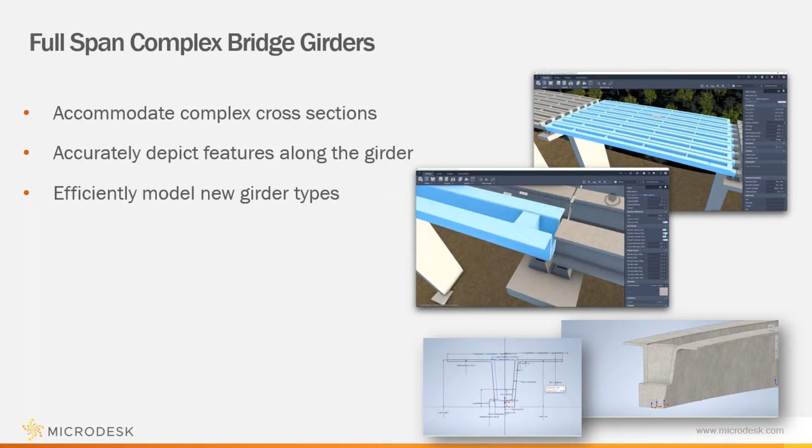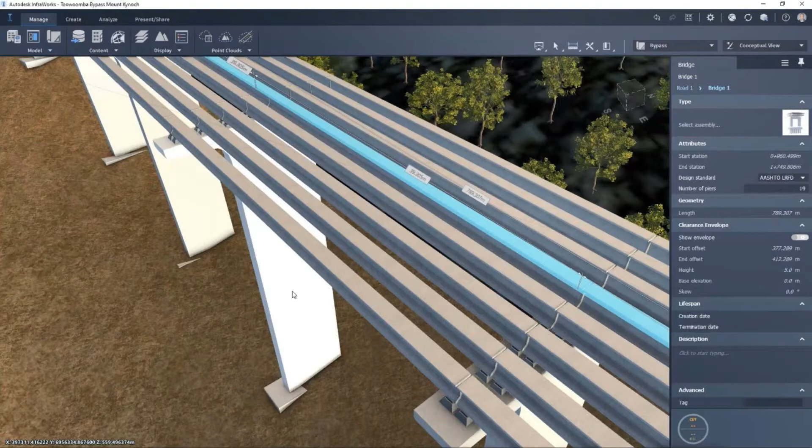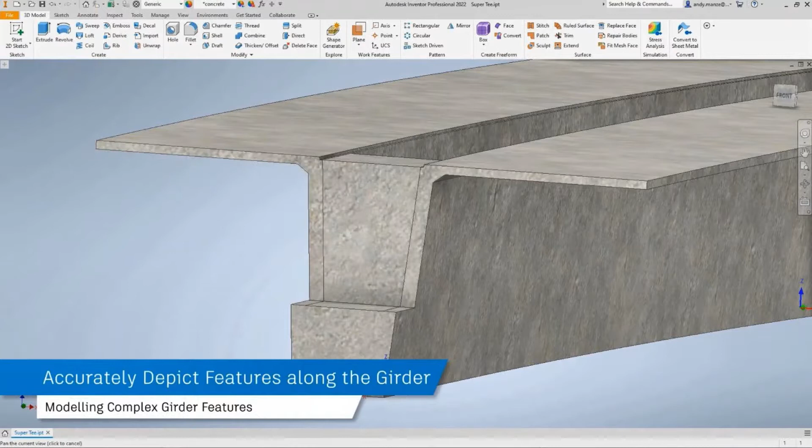It's then possible to start to model additional features along the length of the girder, as in this case where a number of individually defined cutbacks and diaphragms are placed along the length of the girder. Whenever needed, iLogic can be used to define conditional modeling if required. The newly defined complex girder can be added to the InfraWorks bridge component library and configured as needed.

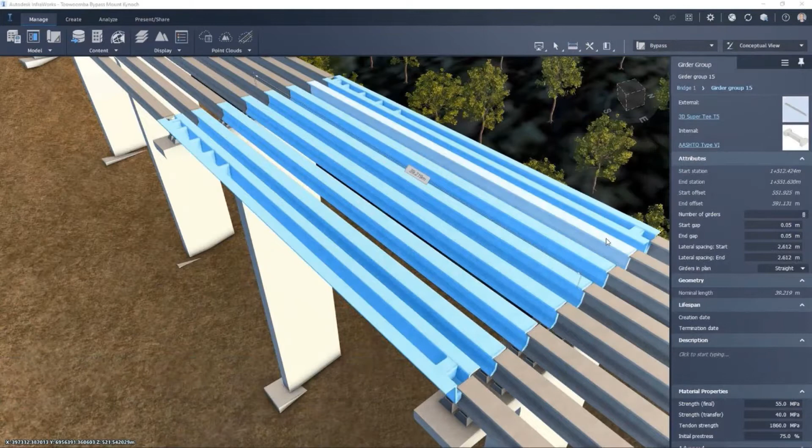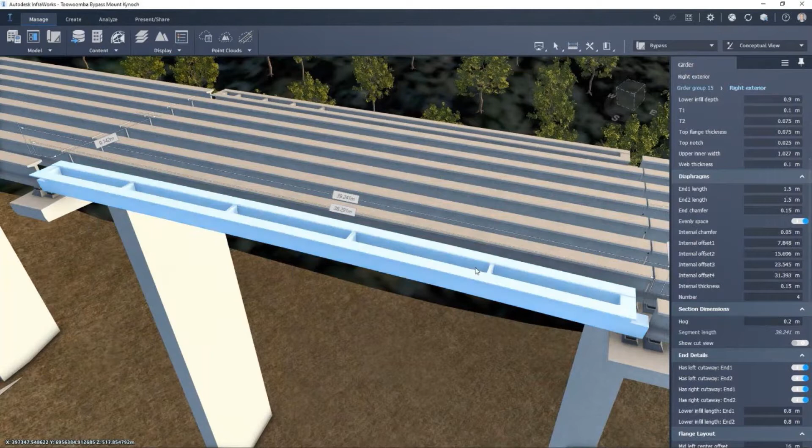The process of replacing the existing girder arrangement can proceed by selecting the new complex girder from the library. The new modeling options provided in the Inventor modeling phase are then exposed within InfraWorks and can then be used as seen here by adding girder end cutbacks evenly spaced and along the diaphragm and adding a precamber. The changes can then be made and then copied to all the additional girders throughout the model.

Active road decorations have been added to the software, and if you haven't explored these, they are a great little tool that can really streamline a lot of the mundane tasks of adding content to your models. Today we'll be focusing on adding them to roads, or component roads in this scenario.

But what is really nice is they've also added it for general layout and design. So you not only can add active decorations to your roads, you can actually add active decorations anywhere you'd like within your model. So why don't we take a moment and explore these new features.

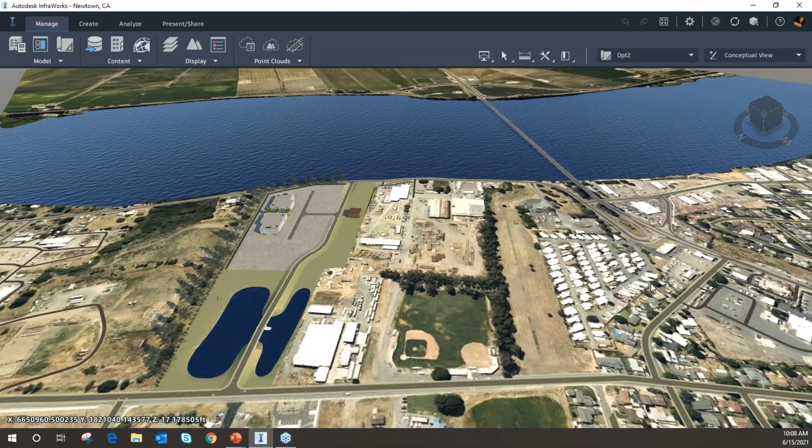In this InfraWorks model that you're seeing, I've laid out a quick little model site utilizing Model Builder and started sketching in a little bit of content for us. I've identified an area where potentially a new project site will be located. And in here, I have a couple component roads, and we'll use those for demonstration.

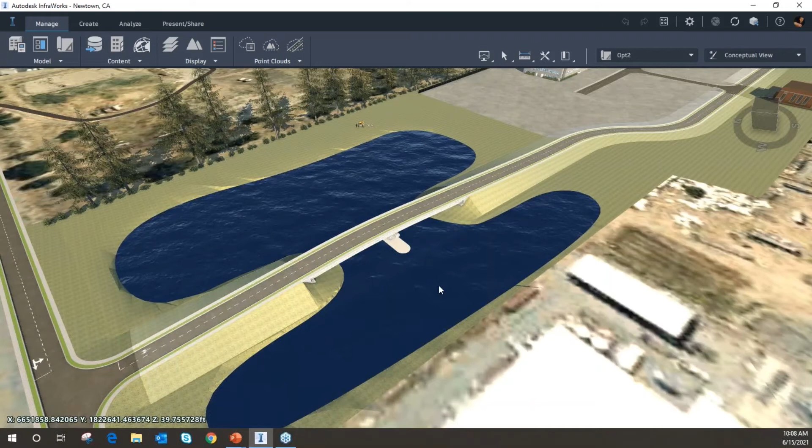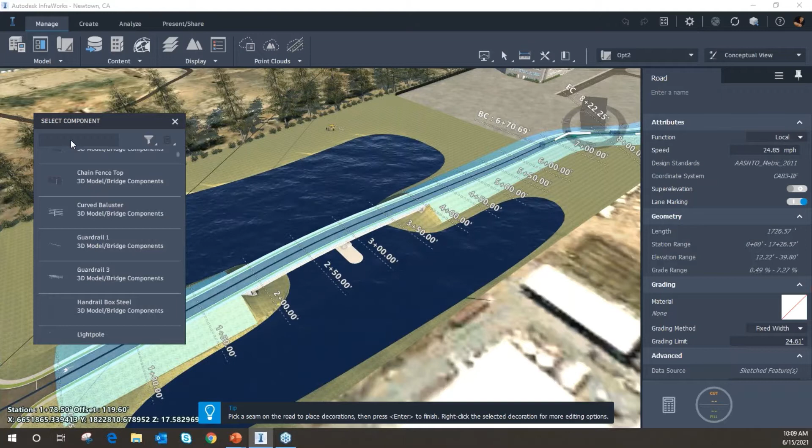So when you select a component road, it'll activate and show you the tooltips for a component road. You can then right-click, and you'll see the option for placing decorations. Once you choose that option, your style library will appear and allow you to search for any type of feature you'd like to add.

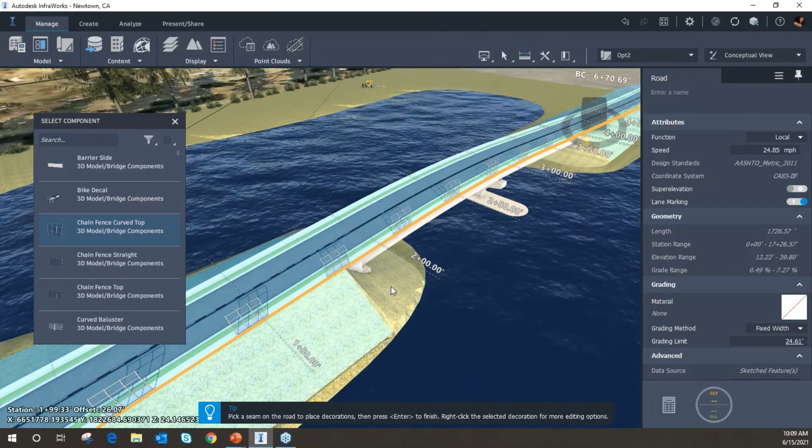So for example, if I wanted to use a curved top fence for this bridge portion, I can do that, and then I can choose which feature along the road I'd like to attach it to. So I'll click and place that, and you'll see how they instantly get added. What's really nice is we don't have to wait for the model or the road to regenerate. And they get added to the entire length of the model.

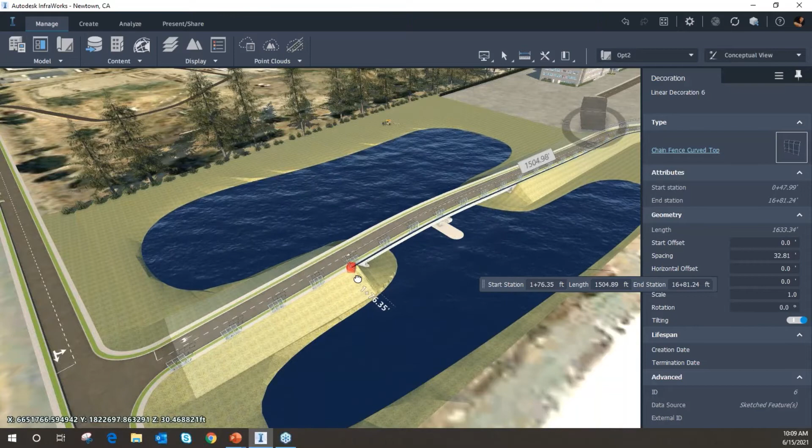And then once those are placed, you'll be able to go in and adjust the properties of them. So we can adjust these start and end points. Do that over the top as well. And you see how they trace the road geometry, regardless where you're at or what you're doing.

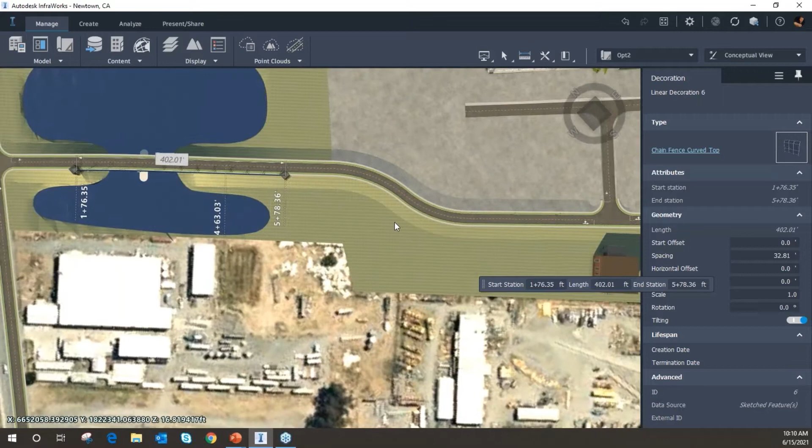And if you haven't noticed already, on the right-hand side of the screen, there's a properties panel for how these are being laid out. You can go in and start adjusting the start and end points if you want, or you can graphically digitize them as I've done. You can adjust the spacing. If I'm correct, I believe these are 10-foot fence spans. We can set up those. You can adjust rotations, offsets, anything else you'd like regarding that fence.

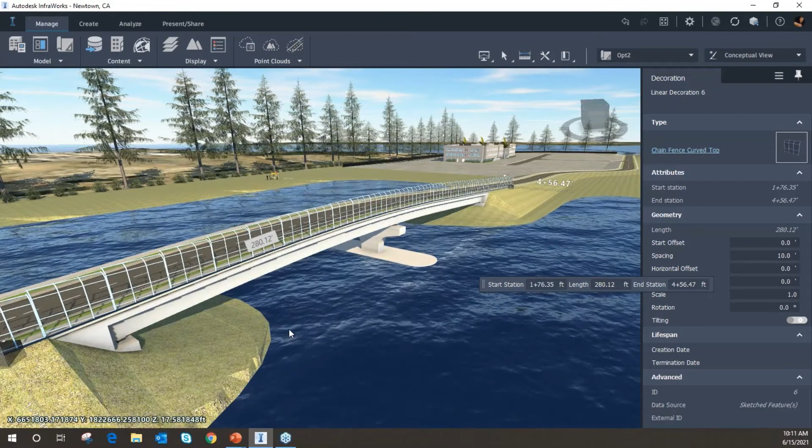And what's also really nice is we have this tilting option, and I have it on by default, but when you don't have that on, you'll probably experience what you may have been experiencing in the past with these types of objects, where they start getting very fragmented. So if you've ever tried to put in a guardrail, a jersey barrier, anything, and everything starts looking a little fragmented and goofy, that's what's great about this little tilt option.

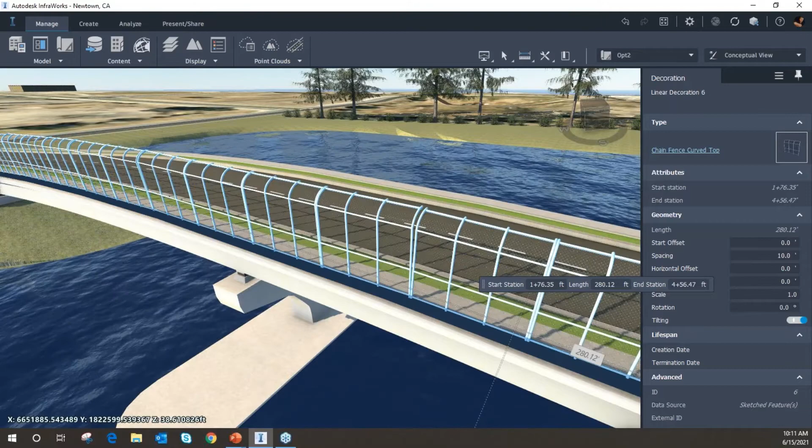We can turn that on, and it will then follow the geometry of the road. So we get a much cleaner section and detail. We can do that again for the other side. Place decorations. I'll use the same component. I'll add it there.

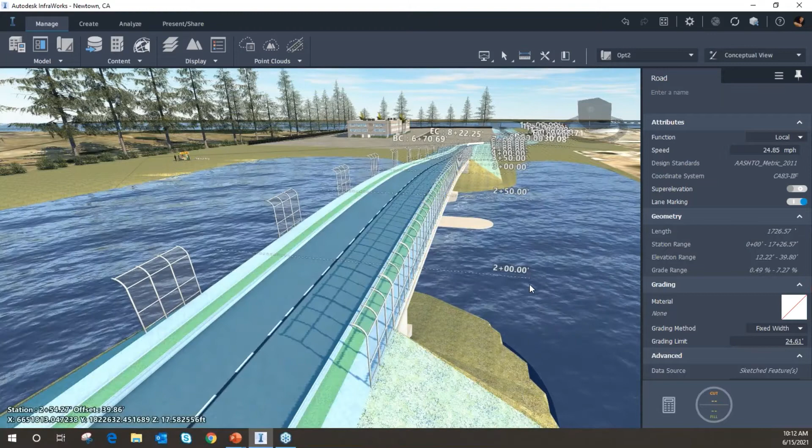And this time, in this scenario, I'm going to need to rotate those 180 degrees so that they face the other way. Once again, we'll do 10-foot sections. And then, as you would imagine, I would go through and redo the start and end points.

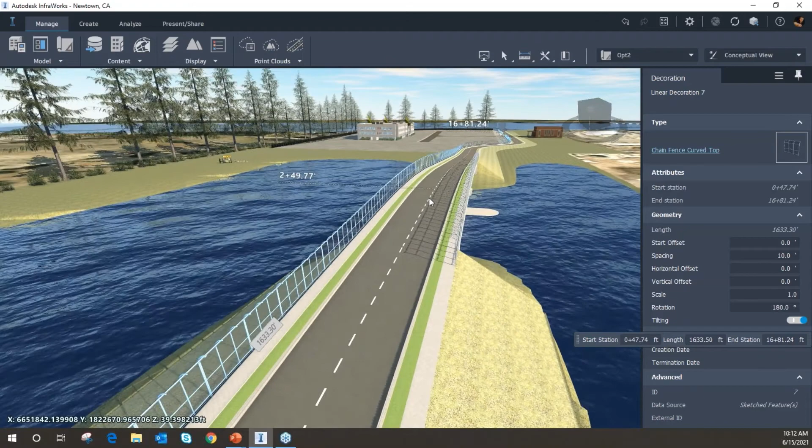So again, you can add all the different content you want to your road without having to go and rebuild a new assembly. So if you wanted to add street lights or trees, things like that, really useful. Another really nice feature that I found it very useful for is adding traffic.

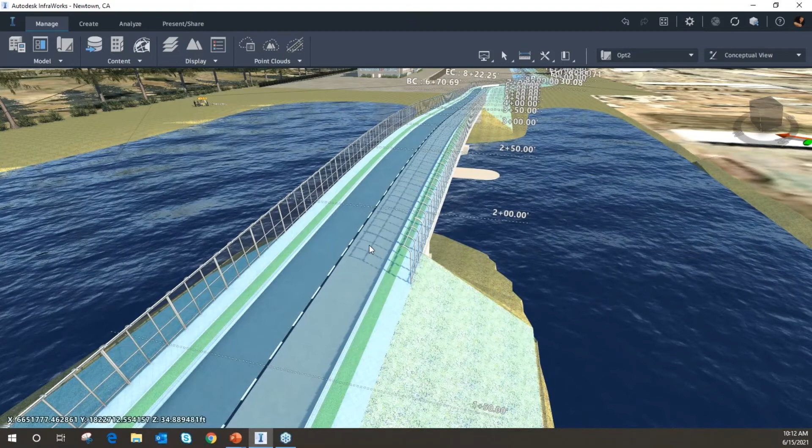Of course we do have the traffic analysis tool, but if you ever just want to populate your roads for a more realistic model, and if you've ever done that before, you know it's very detailed. It takes a lot of time because you have to add a car at a time, and then you've got to rotate them so that they follow the directions of the road and things like that.

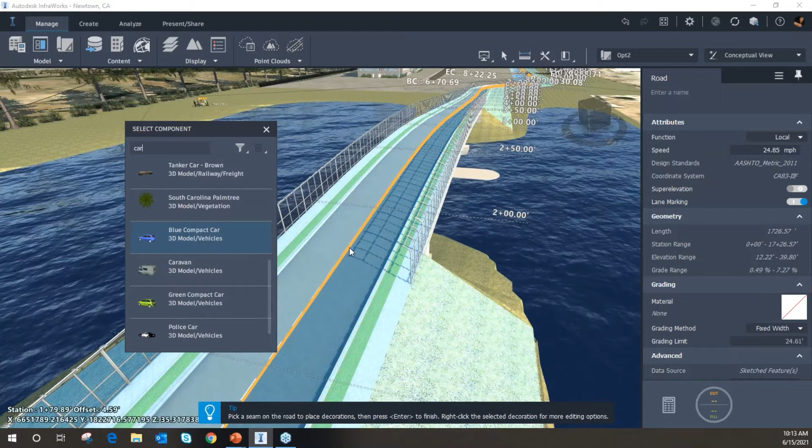But if you just come in and look for any kind of a car, grab one of these, and put it on the center line of the road here. Then once those are placed, again, we get the properties. We'll adjust the spacing to something much larger, maybe 150 feet, and then a horizontal offset like that.

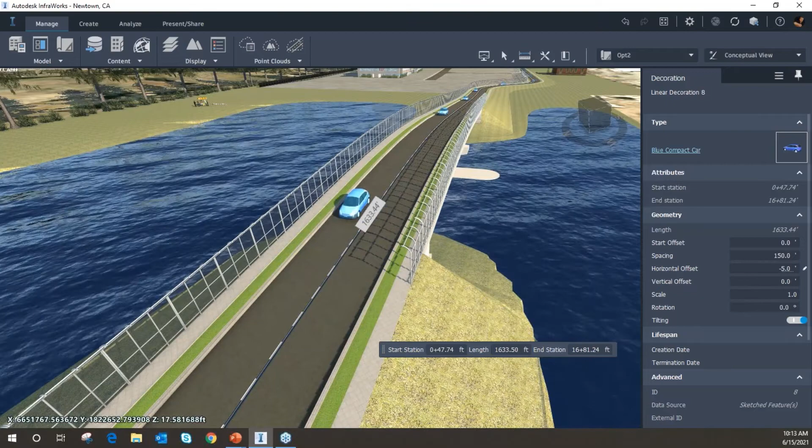And then you can use your style palette to kind of drag and drop different car styles so you get a variety of cars. And then obviously I could do the same thing again on the other side of the road, going the other direction with 180 rotation.

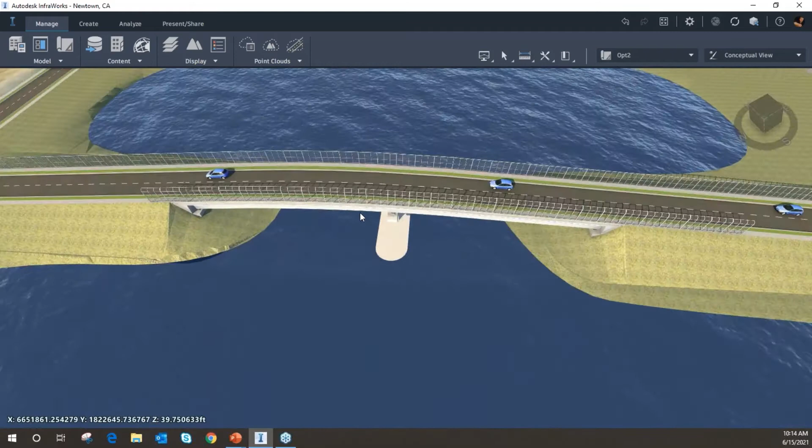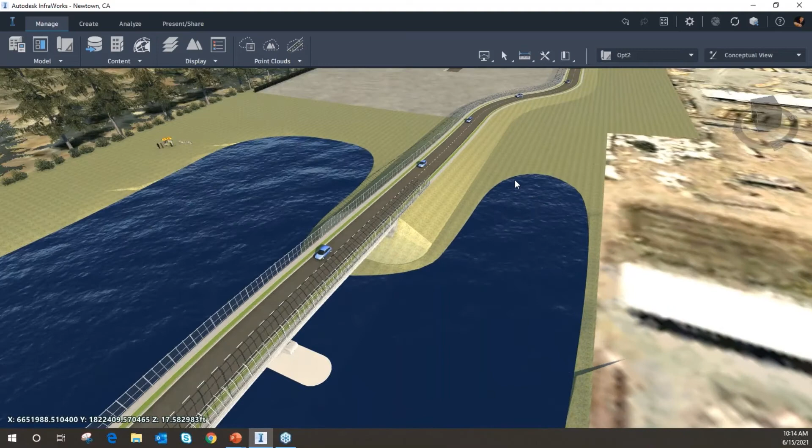But again, if you've ever had to go through and add those types of things to your models, you know it can be very tedious to get them to line up just to the middle of the road and get them to curve and follow along each of the geometries and such. So you'll find that these placing decorations are really useful and really handy. They can save you quite a bit of time.

And then, as mentioned, if you go to the Create panel, you'll notice that we actually have a Place Linear Decorations tool where you can actually just place linear decorations anywhere within your model just by clicking and identifying where you want it to go. So that could be vegetation or bollards, or just about anything that you can think of that would be really handy to see. So I think that's a really nice enhancement and can definitely streamline a lot of your workflows.

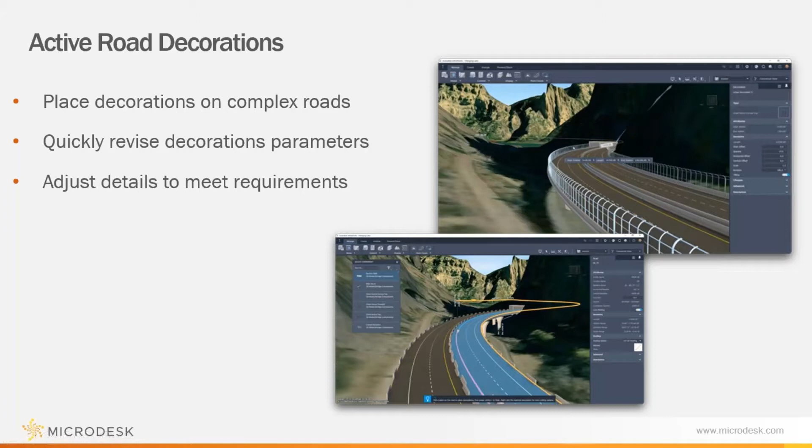Another nice enhancement they've done to the software is they've expanded the vegetation library. And they've done a really good job on this because it allows you to have much more content to choose from, and it's much more realistic. So rather than just applying a grass material to your terrain, for example, you now actually have grass and flowers and bushes, shrubs and meadows, things like that. So it's definitely a nice little enhancement. So let's take a look at some of that as well.

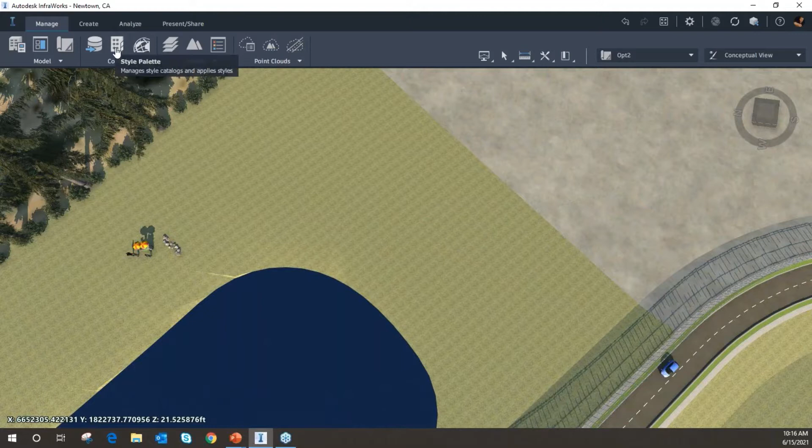So if we identify an area, let's go and find some open space, maybe right over here. We can come through, and on the Create panel, we can choose to create whatever we'd like. And in this case, we can use stands, rows, whatever we choose from. But before we do that, let's take a look at what they've added. So I'm going to go back to my Manage panel and open up my Style palette. Inside here, we can toggle through the various groups. And in this case, we'll be looking at 3D models, and we'll go over to vegetation.

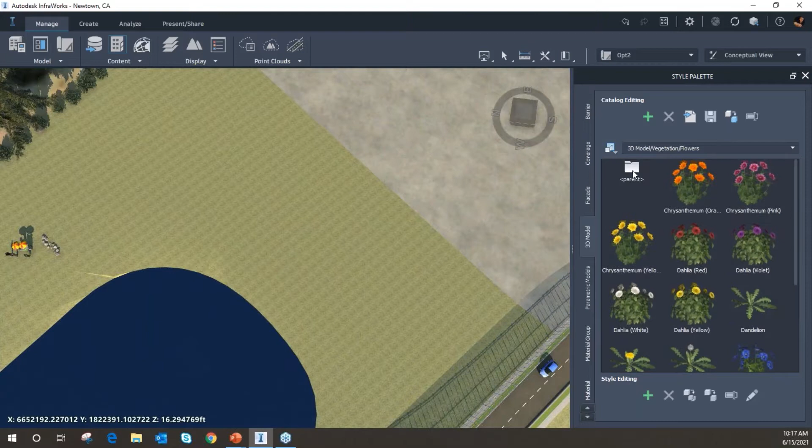And then from here, we can see this is a lot of the standard content you're probably used to seeing in InfraWorks. So I had a decent amount of trees and such, but you'll also notice now there's quite a few additional folders that are contained in here as well. So we can go look at flowers, different flowers, dandelions, sunflowers. We have adaptive trees, which are a little bit more dynamic. We have bushes, different grass types now as well.

Hedges, meadows, and then what they call optimized, which is just a tree that runs a little bit more streamlined. It doesn't slow you down quite as much when you're placing just tree locations. So let's start off by creating some of this stuff. So I'm going to close. Actually, I'm going to leave it open so I can reference the naming in some of these. It'll be a little bit easier, I think.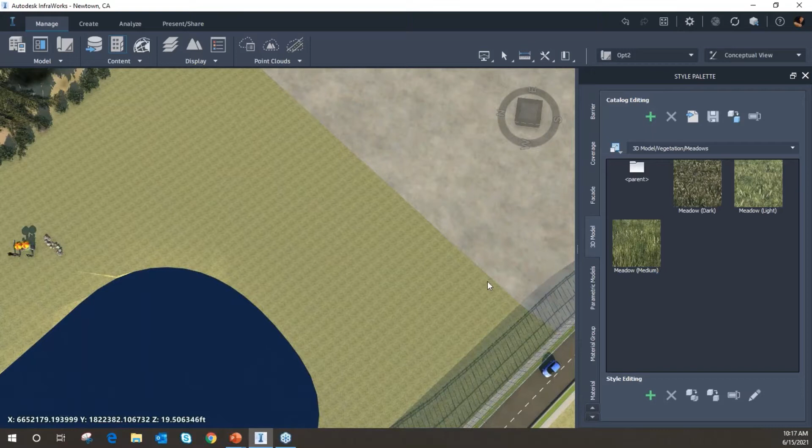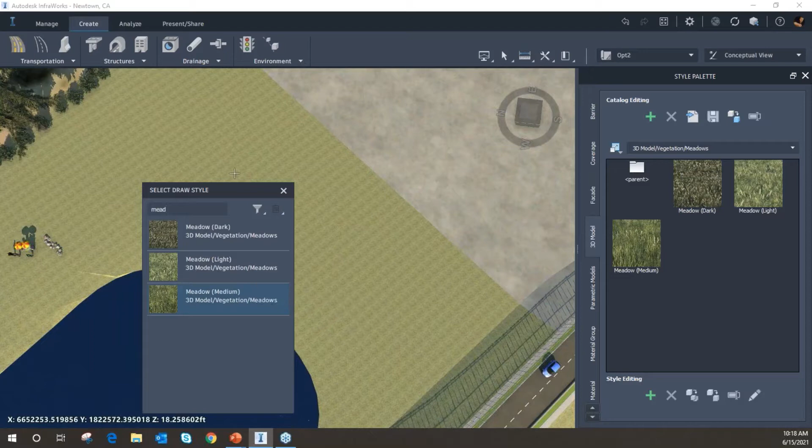So let's add some of these meadows. I'm going to go over to Create panel. I'll come over and I'll just say I'm going to do a stand. And then from here, again, referencing the Style Palette, I'll grab the meadows, medium vegetation. And we'll just define out a quick section. And the grass patterns I was referring to are actually already on the terrain. So you can see they're not very realistic.

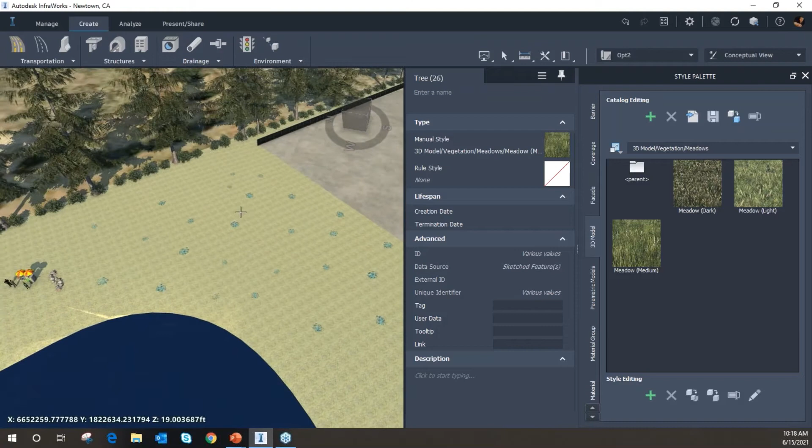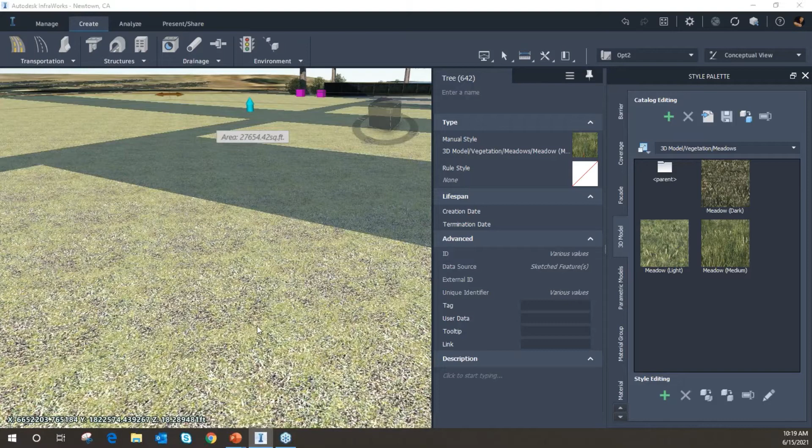So once those have been placed, we can now see those. Stretch that out a little bit. We can scale any of this content we want. Let's just make it really visible for everybody. And we'll crank up the density. Take it all the way to the top. There we go. So as you can see, much more realistic looking grass now. So definitely a big improvement.

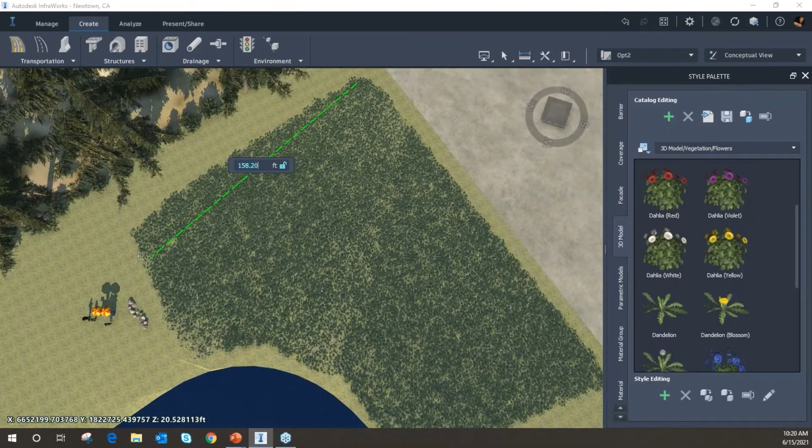And then we can even accentuate that more by, let's go ahead and we'll add some of these here. So we'll come in once again, and we'll add a stand. And this time we'll add some dandelions. Just kind of mix it up a little bit. We'll trace out a similar location. Just add some additional content here. Just get some variety, make it a little more realism. Double click to finish that command.

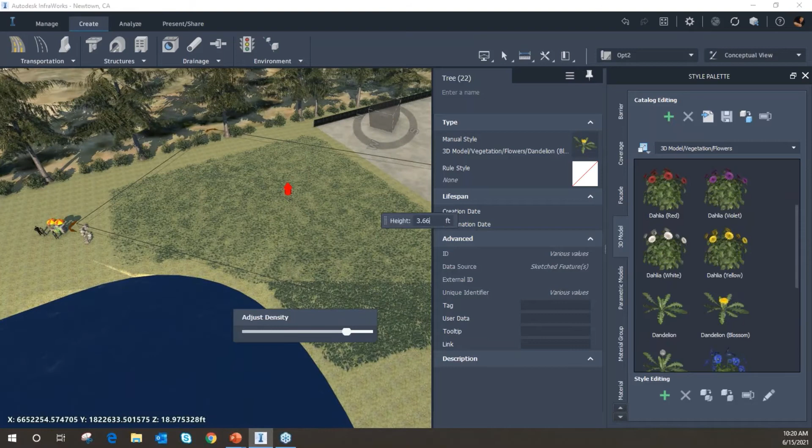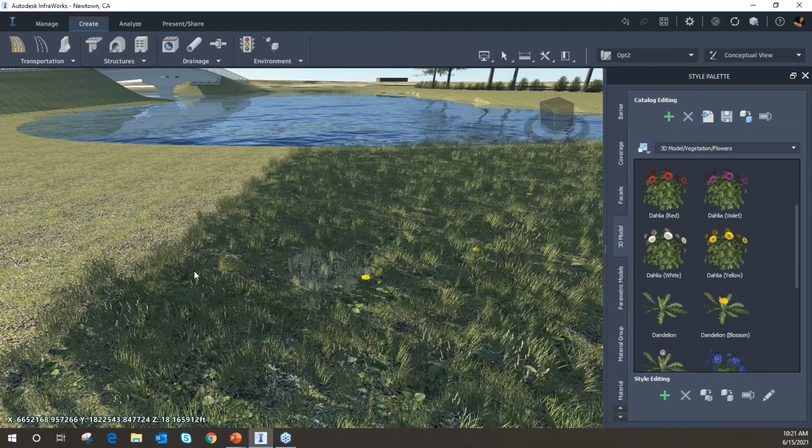And then once again, just to kind of make it about equal, crank that up, make it a little bit taller. And we don't need to fill the entire grass, but we'll add a good amount more to that. And again, now you can see how we're getting a little bit more variety here. And it's just giving you a much more realistic look now. So I think you're really gonna enjoy those, especially when you have those close-up shots or close-up animations that you're doing. It's gonna be much more realistic looking now. It's not gonna be that flat pattern grass we saw before. So definitely a big improvement in my opinion. So yeah, you can explore those and you'll find quite a bit of content in there as well.

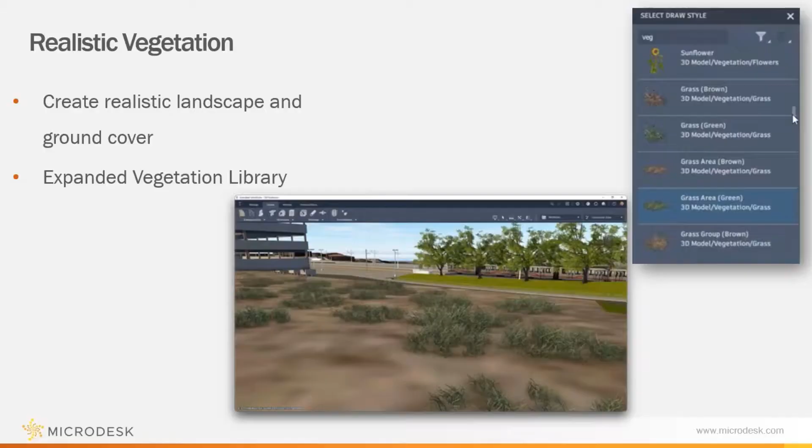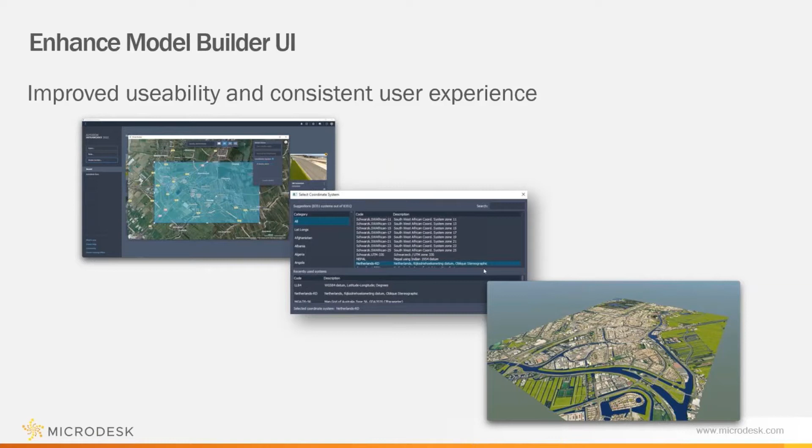Another thing they've done is they've improved, once again, the Model Builder UI, which is really handy, but they've added some great new features to it. So let's take a look at that also. So I'm going to go ahead and go back up to my homepage and over to my Model Builder. And so when you open Model Builder, and again, many of you have probably seen this many times over and probably utilized it as well, you'll notice that it's a little bit different now.

And so we have our standard mapping that we've always had. We've also got aerial view now as well. So we can come through and look in a more realistic fashion. So I can come in and look around to see exactly what I'm capturing, not just by road name and map. Also, I have a much more intelligent way of defining my project as well.

So I can search up on top. I can grab what's currently on the screen. I can choose to draw a rectangle. I can also choose to draw a polygon, which is new. So if I had an irregular shape and I didn't want to just bring in a big rectangle and have to create a boundary and crop it out later, I can do it right now, and therefore maintain a smaller project size and file size, so I'll have much more functionality, and it'll perform a lot faster.

And then also another benefit is they've given you the ability to import a polygon. So if you already have a predefined project boundary, you'll be able to import that, and then that will define your area as well. From there, I can go through, give my model a name, as well as a limited description, and then I can go through and predefine the coordinate system.

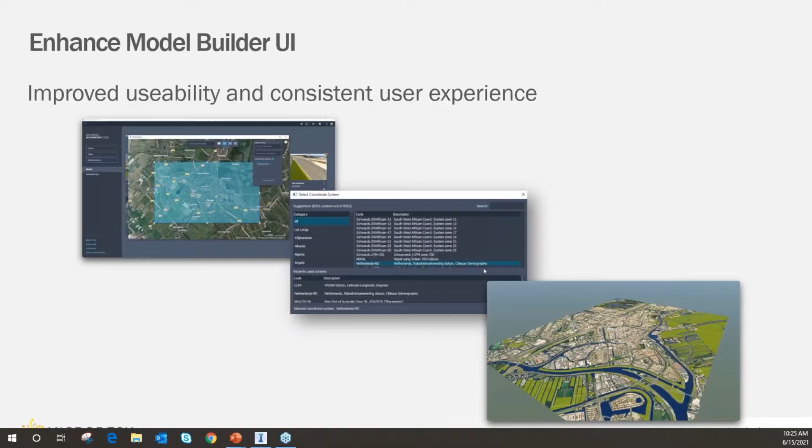And that pretty much concludes the most major, newest features that have been included in InfraWorks. And then, as I mentioned, Autodesk does release InfraWorks slightly differently than a lot of their other products, where it's not just an annual release. There are intermittent releases every few months or so throughout the year as they're defined and ready for release. So if you have not gotten any of those pre-2021 versions, these are a lot of new features, and there's probably quite a few more that you haven't experienced as well.

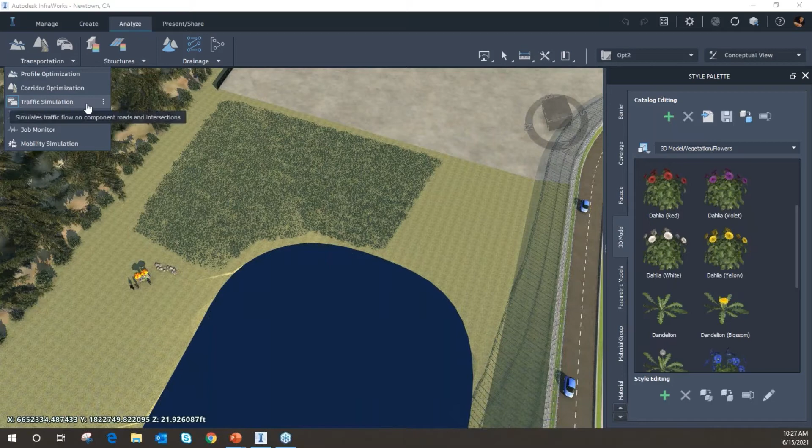The next question, are there any car moving simulations available? Yes, there are. Those aren't new in the new release features, but there absolutely are. So if you go over to the Analyze tab, you'll see that there's transportation analysis that can be done in here. And there's quite a few of them in here, and one of them is a traffic simulation. And this used to be a cloud service, and it used to cost you 1 cloud credit each time you ran it. But it has since been moved to a local system.

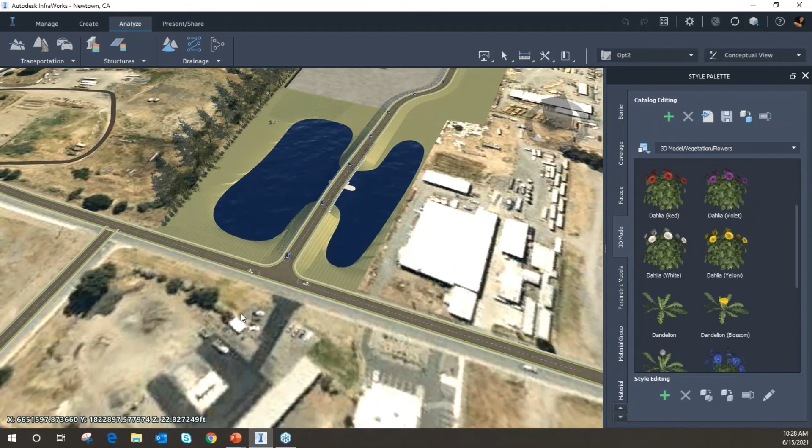So anytime you want, you can launch the traffic simulation tool, identify an area within your model, just draw a polygon or a rectangle, and it will utilize any traffic data that's available online, any GIS data, any congestion data that's out there, and using that information, it will simulate animated traffic flows throughout your project.

So it can be on existing roads around your project. It can even be new roads that you're about to design. It'll even tell you what the traffic is to a road that doesn't exist yet, because it'll show what the traffic flow going into those roads would be. And so again, that can be run and animated through the software, and then you can save that to an animation if you choose to.

And also, once that comes in, you'll also have access to the traffic data. So if you want to manually go in and start editing timing, stoppage and pileups, and time of year, time of day, things like that, you can also edit the traffic to manipulate the animation analysis.

Can those animations be exported? Yes, they can. They can be exported in a number of ways. They can be exported from the software. You can also, as it's running, utilize any video recording software to record the animation as it's happening in the model.